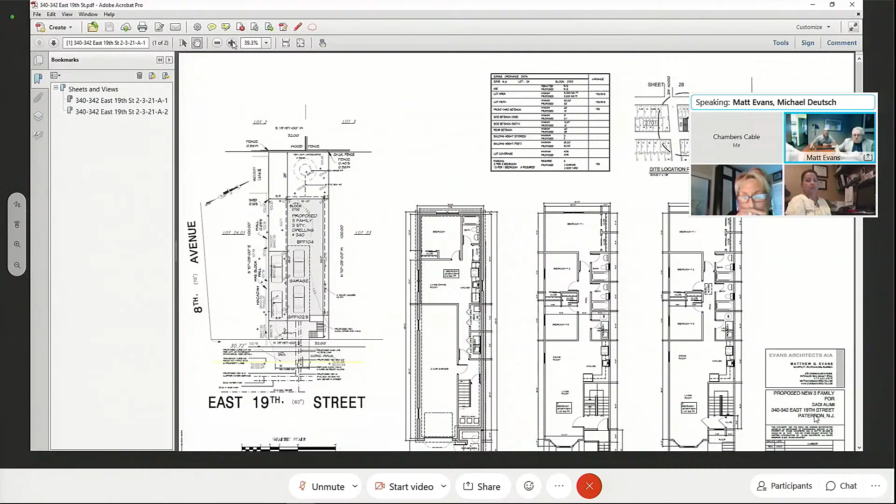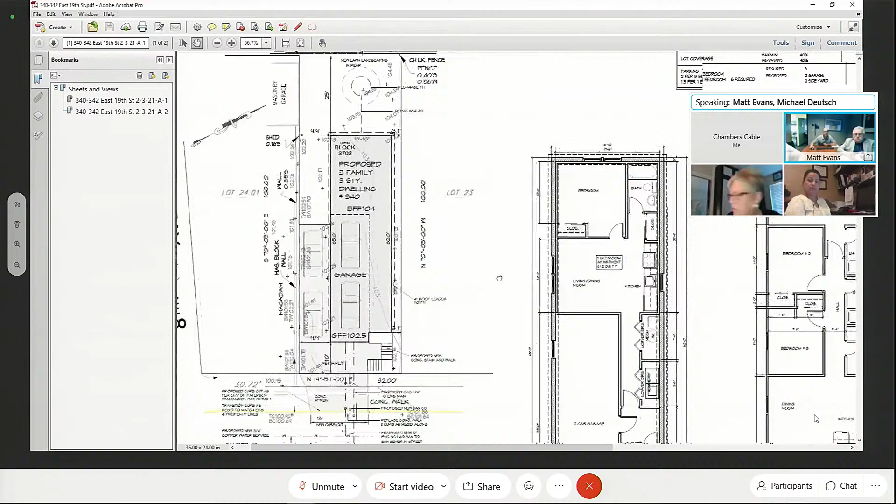Okay, so we have basically a two-sheet submission showing, as Mr. Deutsch spelled out, the site plan, floor plans, and elevations. We are seeking to develop this lot as a three-family with 4 parking spaces.

As I mentioned, we have 2-car parking in the... Matt, please speak up a little more. It's very difficult to hear you.

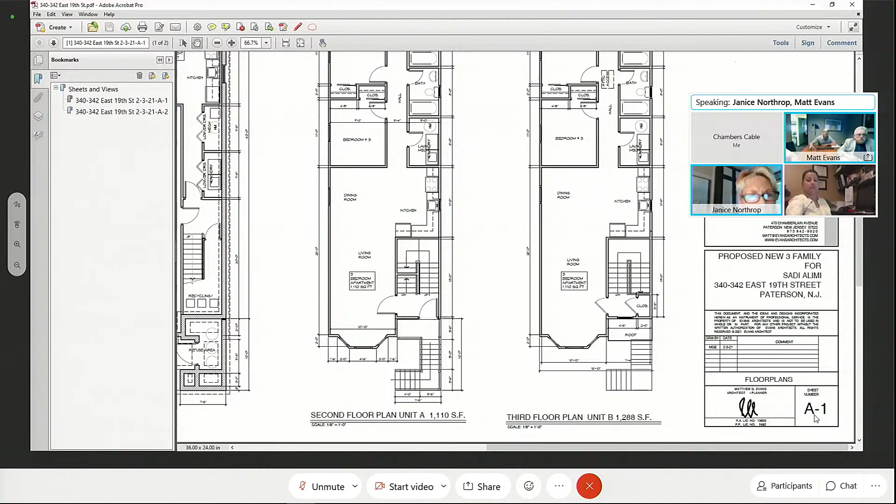Melinda, are you having a problem? Yeah, I'm struggling to hear him. Yeah, we're all struggling, so you gotta speak up, please. Let's move up. Maybe you need to move up, yeah. Yeah, I'll move up, I'm way in the back.

What's that? Yes, okay, hold on. All right, so I'm having a little difficulty posting this right now. Do you have the plan there for the rest of the...

So as I mentioned, it's a standard 3-family, 2-car garage, and we would be proposing... give me a second.

What happened to the plans? Oh, yeah, all right, I'm gonna post it in a second. He's having some difficulty, but we're working on it. Okay, so we have... Oh, it's not posted, right? Hold on, no, it's not posted. Give me a second, I usually... It was there and then it's gone. I know, I'm getting it. Here we go, here we go.

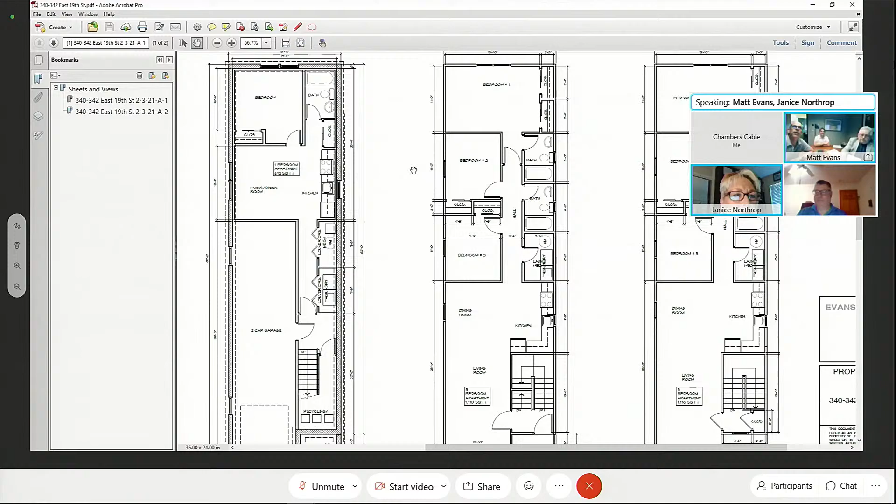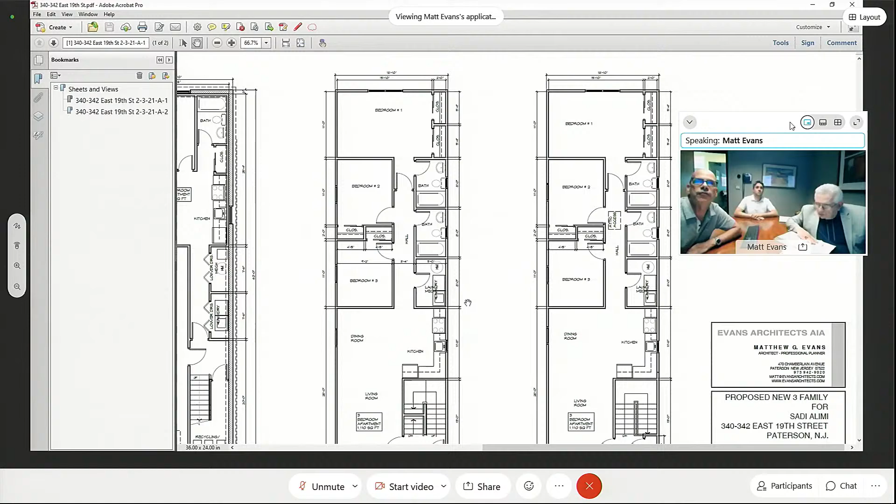So we have the lower unit, and the upper units, unit A and B, are identical. They would be 3-bedroom units, 2-bathroom, we have laundry for the units, and all separate mechanicals.

We have the elevations, so you've seen this probably in many other locations. Basically we have a double gable with a bay window in the front, 2 entrances, and also a different mix of materials. We have stone, brick, stucco, and siding. The side and rear are a little bit less detailed, and that's basically the architectural.

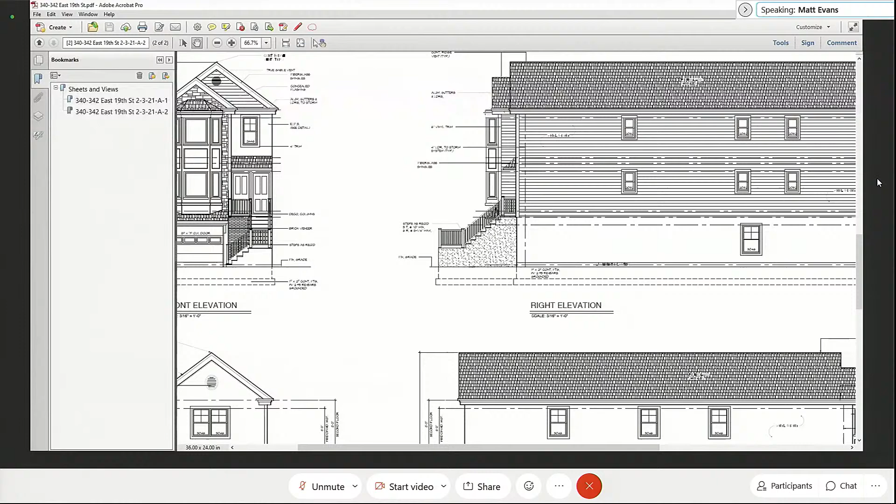Okay, so with respect to the variances that are created in this site, could you give us a summary? So we have 5,000 as the minimum, we have 3,200 square feet, that's a pre-existing non-conforming condition for site, lot width and area. We have 50 required, we have 32.

The front yard setback is 20, but there's an allowance of up to 10 feet based on the consistency of the other neighboring buildings. But we haven't done a survey of it, so we're seeking a variance for that based on that condition.

Then there's the parking where 6 are required. We have 2 in the garage, 2 in the side yard, so we meet 2/3 of that requirement, with parking in and out.

And even with respect to all the other setback variances for side yard, building height, number of stories, coverage, we're in full compliance. Right, so if you pictured a 50 by 100 lot with a similar construction, we still meet those setbacks even with that reduced 18 feet.

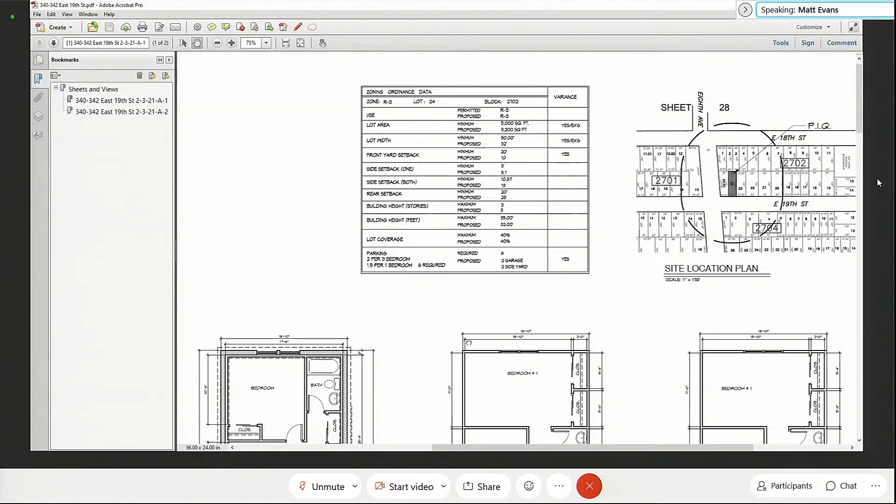We have, if you could show that again. We have 612 square feet on the one bedroom, and 1110 on the 3-bedroom units, which meet the 1,000 square feet minimum requirement.

So these are standard size in accordance with all building and fire codes? Yes. Okay, very good. And in your opinion then, the development or proposal of a 3-family house is suitable and conforms to the surrounding area? Yes. That's all I have, Madam Chair, at this time.

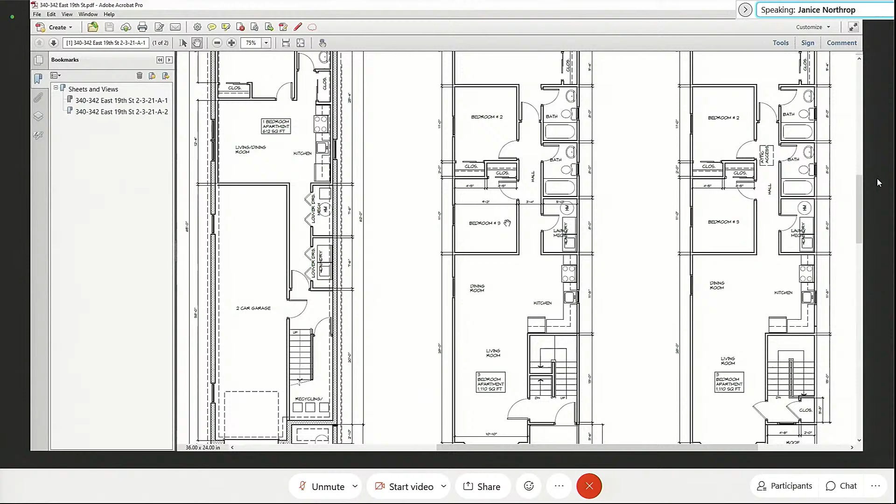Okay, you said you only had one other witness. Yes. Please call that witness. Sure. Well, Mr. Alimi, don't switch chairs again, okay.

Please raise your right hand. Do you swear affirm the testimony you're about to give is the truth, the whole truth, and nothing but the truth? Yes. Say your full name for the record. Sadi Alimi.

And Mr. Alimi, you are the principal owner of the LLC, which is the applicant and property owner, is that right? Yes. And you recently acquired this property with the intention to develop a 3-family? Yes. You have other developments and work in the city of Paterson, is that correct? Yes, many. So you're familiar with construction of 3-family houses? Yes. In fact, you own some developments right in the surrounding area? Correct, 2 blocks away, I actually have a development with 9 units that is going up as we speak.

Can we hear us okay, Madam Chair? No, I couldn't hear where it's going up, I didn't hear that part. It's on 8th Avenue, a few blocks away.

Okay, you've got other multi-families and other residentials in the area? Yes, a mix of 2, 3s, and 5 family units in here. Okay, and with respect to this site, this property would be developed for residential rental units, is that right? That is correct.

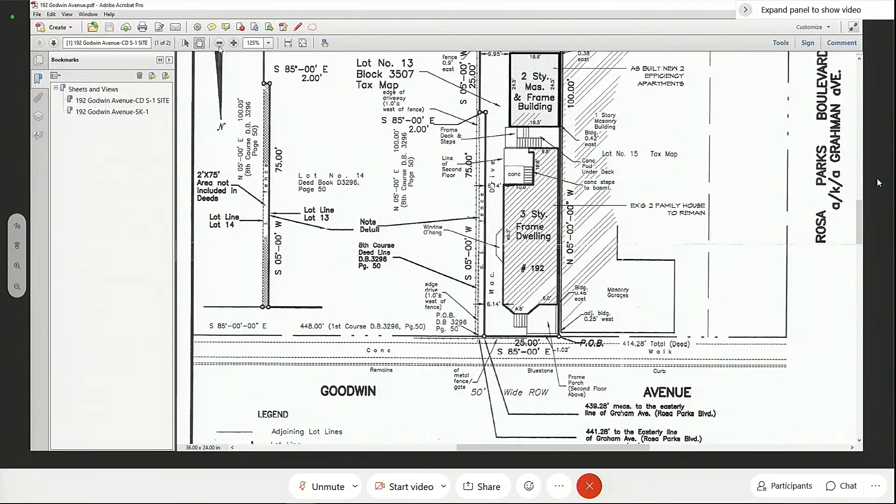Yes. With respect to this site, could you give us an overview and its area location? I'm going to share my drawing here. So we have the first sheet, S1, showing the survey and zoning ordinance data, the site location plan, and as mentioned before, it's in the RA2 zone.

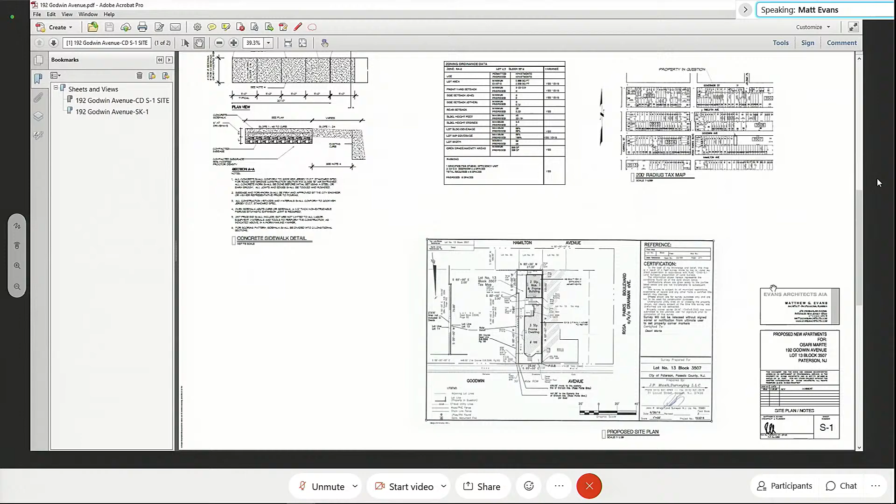It's a redevelopment zone that permits multiple families on smaller lots. The existing 3-story frame structure in the front of the property would remain, with the addition of a 2-story structure as built in the rear.

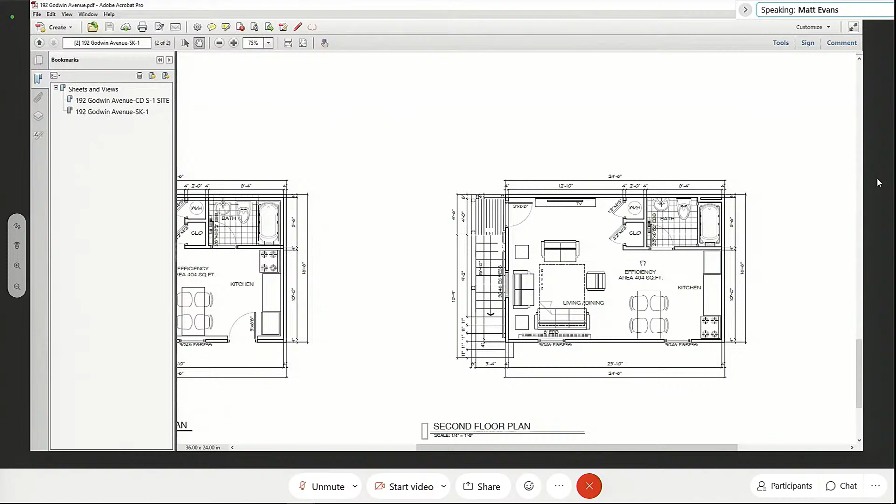So the plan showing the first floor plan - we have a unit, an efficiency unit, 400 square feet, a small unit with a nice area to it. It has a bathroom, kitchen, living dining area, sleeping area, and an outside stair that brings you to the second floor, where we have another identical efficiency unit above.

So that's the same layout condition on the structure. We can see the siding and roofing and that one stair that's for the second unit above. And those are comparable units in size and design?

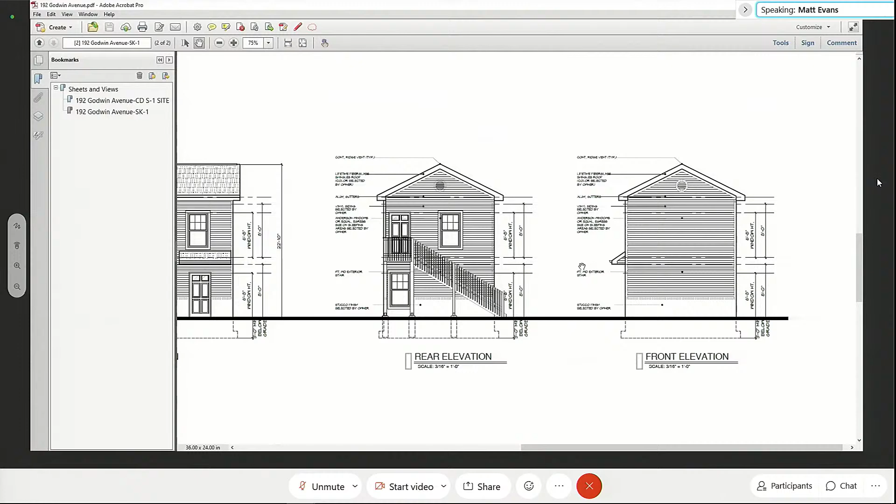Yes. So they both would reflect housing availability for at most 2 people, but very likely 1 person per unit? Yes. And again, in the RA2 section of the redevelopment zone, this lot size of approximately 2,500 is fairly typical? Well, this is a little bigger - 2,700, and it's suited for this type of density, comparable with density in the area.

So then a total of 4 units on the site, in your estimation from a planning perspective, is comparable to some new proposals that have been granted and some older conditions? Yes, there's older multifamilies, new mixed use, depending on the size of the lot and where it's located, but it fits in with the redevelopment plan.

And we were able to obtain and design some open space on this site. Yes, we have open space. We need a small variance for the open space - 900 square feet is required, we have 500, and we've been looking for relief on that.

Now there is some side area to the property, but that's not an actively used area along the fence of the neighboring area. It's just a walkway, basically you can access the back of the property. It's not enough to be a driveway, but it's comfortable enough to be a pathway.

So the residents could use that area as a transit area, and perhaps sit out there on a lawn chair or whatever as well. Yes. The other variances, in your estimation, building coverage of the lot is very minimal.

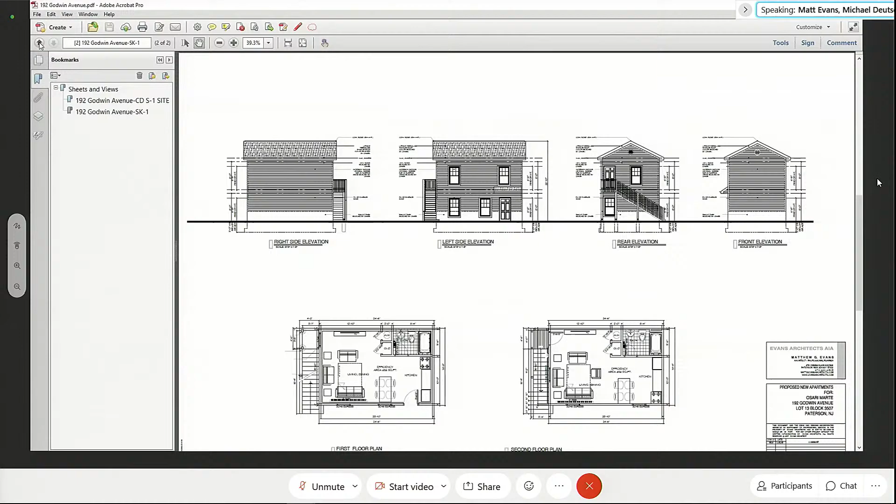It's 3% over, so it's consistent with the requirements of the RA2. And a couple setback variances - in your estimation, do they create any negative impact on any surrounding neighbors? No, not negatively. You have the big industrial building next door that was converted to apartments, and some similar type of structures. Zooming in here a little bit, you can see this 1-story masonry building here.

Garages, it's basically a 0 lot line condition. Our structure on the right is a 0 lot line condition. We don't have any windows on the side, we have them on the rear, front, and left side. And those are not parking garages, so we're not taking away any parking.

That was a commercial garage of some sort - storage or whatever back there originally, I suppose? I'm not sure. But it clearly was not - there's no access to park back there. No, it's only 6 feet to the property line. So I just wanted to point out that we're not taking away parking.

And you said there's a multifamily directly adjoining to us? Yeah, the Godwin Apartments on the left - it's a large industrial building which was converted about 20 years ago to residential. So we have basically a large parking area next to us. And we're adjoining to other residential units on the other side?

Well, if you know - no, it's showing garages here. I don't think it's residential. But the area is primarily residential? It's just basically garages.

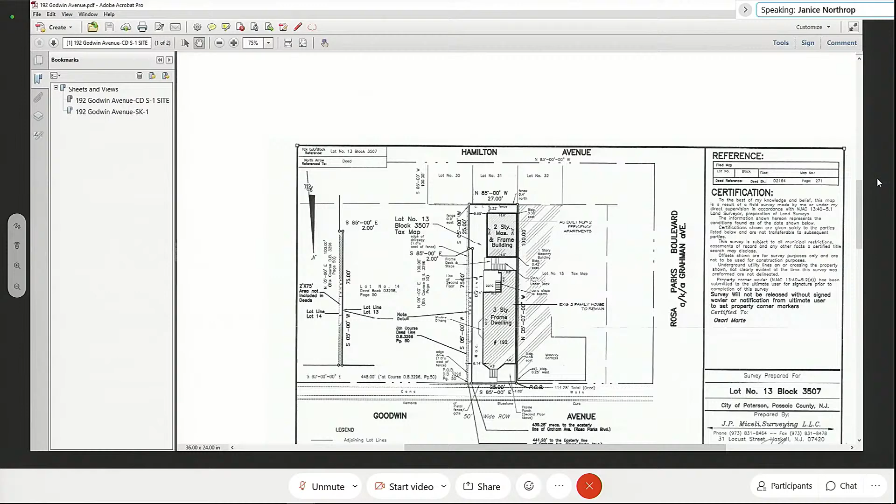You said your clients recently purchased this property, correct? So who then constructed the two areas in the back without permits? I'm going to let them discuss that, if I could, on the record, Madam Chair. Okay, alright, so then call them, that's fine.